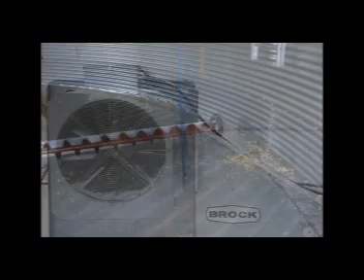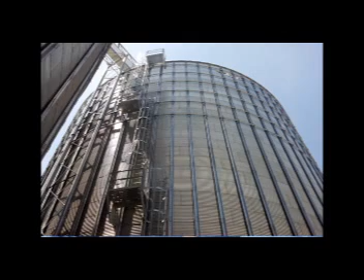Hello everyone, and welcome to the AgriDry series Grain Quality Control Topic of the Week. My name is Clint Walker, and today's topic is the recommendations and effects of freezing grain. When steel grain bin storage became available in the early 1900s, the bins were only 12 feet in diameter and stored only small amounts of grain. To help maintain quality during the winter months, many grain handlers froze the grain throughout the bin, which, to be honest, was a secure method to increase shelf life of the grain. Just like in a freezer in your home, it was able to hold the valuable product for a longer period of time until the bin became empty. And still, to this day, this method is favorable for dry grain if there's no way to monitor the grain inside the bin. However, this theory has changed for many grain handlers to maximize their profits. Freezing grain is costly and dangerous. Excessive fan run time to achieve the frozen grain temperatures increases electrical cost. The risk of having frozen grain columns throughout the bin can cause unloading issues as well. When the outside temperature begins to warm in the spring or summer, the temperature differential between the grain temperature and the outside temperature can cause condensation issues on the sidewall or the top of the bin, which leads to spoiled or crusted grain. As grain bins get larger with increased bushels, grain handlers are storing the grain for a longer period of time. The need for monitoring this equipment is a must. AgriDry reads Type T thermocouple cables in our Bullseye controller.

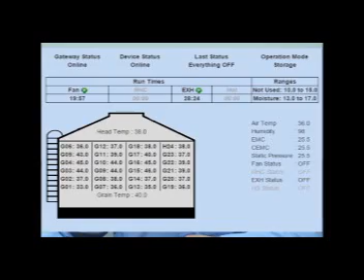Always knowing what the grain temperature is throughout the bin helps maintain quality and ensures the temperature front has moved through the entire bin. We typically read 6 sensors per temperature cable, with sensors evenly spaced from the bottom of the bin to the top. Sensor spacing and cable lengths are sized appropriately for each bin. We have the ability to read up to 4 temperature cables into the controller for a total of 24 sensors.

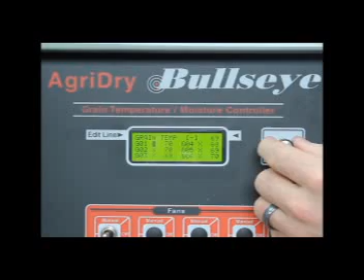The grain temperature is displayed on the controller consisting of 6 sensors per page, which you can select with an X for sensors that are only in the grain. You set up a target temperature window, and the controller will gradually lower or raise the grain temperature to the target window and will maintain that temperature until the settings are changed.

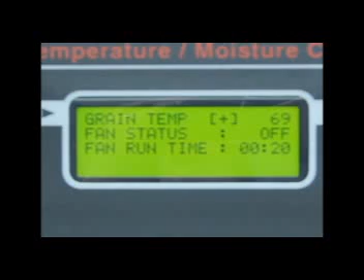AgriDry also controls the fans in the grain bin, in which we can assure that the fans do not operate during freezing conditions. The minimum air temperature setting on the controller is typically set at 35 degrees for aeration and natural air drying and prevents fans from operating below this temperature. When natural air drying grain, the grain temperature should never go below freezing. The moisture inside the grain cannot escape if it is frozen inside the kernel.

With the grain temperature always above freezing, natural air drying can be completed immediately as soon as the outside temperatures are consistently above freezing. If the grain moisture is high and the number of drying days are limited, the minimum air temperature setting can be set down to 30 to 32 degrees to capture more fan run time. This can only be done if the outside air temperature goes below freezing for short periods of time.

In conclusion, the equipment that AgriDry offers increases your profits by monitoring your investment and operating the fans when it's beneficial for the grain.

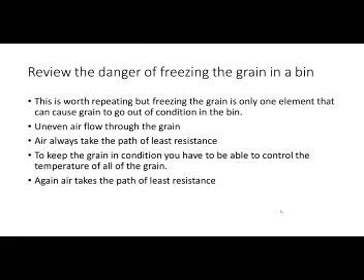So why does grain spoil in the bin? In a typical bin, there are spots that will never get any air through them, again, because of accumulation of fines. And I'm repeating and emphasizing this in the webinar this morning because it's very important. It's complicated, and a lot of people don't understand or don't have the equipment to properly monitor and control what goes on in the bin. So I'm pointing out and repeating what causes the problem. So you have an accumulation of fines.

You have the wrong size fans. They can either be too small or too large. And when I say fans can be too large, then simply, in most cases, if 3 fans are good, 4 would be better.

In fan sizing on any bin, bigger is not always better, because of the static pressure that's created by the fan, back pressure on the fans, once you reach a certain point with airflow going through the grain. There are two items that affect your static pressure. One is the depth of grain you're trying to move, and the other is the volume of air you're trying to move through that depth of grain. So if you increase the depth of grain or the amount of air you're trying to push through that depth, your static pressure goes up or down accordingly.

Now, what you want to do is maintain your fan efficiency by having the fan operating in its sweet spot. So if you increase your airflow, trying to push more air through that bin, you create more resistance coming through the grain, and then your CFMs per horsepower start to deteriorate, and you won't get as much air through it.

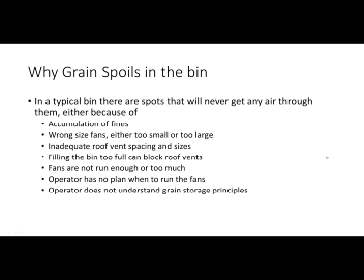Filling a bin too full can block roof vents. Again, you're channeling air, so if you fill it too full, that air can't get out or can't travel toward the vents, which will make trouble for you too. Fans are not run enough, or they run too much. So how do you run your fans? The operator may have no plan on when to run the fans, or does not understand the principles of grain storage. So let's go to your next slide, please.

The same thing can happen in the grain bin when you put warm air across cold grain, or cold air across warm grain, and you have more than a 10 or 15 degree temperature differential, and that varies some depending on the relative humidity of the air, how many degrees it would actually allow before the moisture condenses. When you condense that moisture on the surface of the grain, you're re-wetting grain, and that's where crusting starts. Next slide.

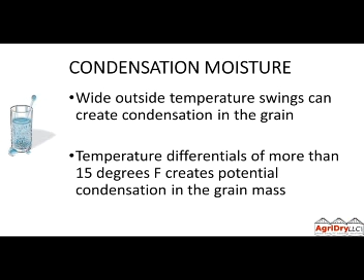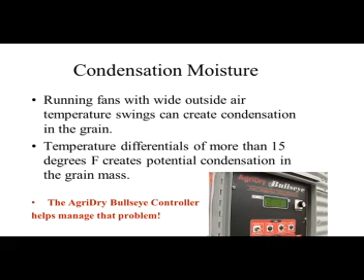And again, condensation moisture. Running the fans with wide outside temperature swings can create condensation, and a differential of more than 15 degrees Fahrenheit creates potential condensation in the grain mass. So an AgriDry Bullseye controller helps to manage that problem, because we set high and low parameters and don't run the fans in extreme high or extreme low temperatures, or when the outside air temperature is more than, let's say, 15 or 20 degrees away from the grain temperature itself, and then we eliminate condensation occurring inside the grain mass. Next slide. So this shows moisture migration in the bin. We've all seen these charts.

These were created years ago, and they've been around forever. So what that first picture illustrates on the left would be a bin full of warm grain with cold outside air temperature. So warm air rises and cold air goes down. So if you look at the arrows in the bin, center of the bin, the air is going up. Well, the outside air is colder, so the top surface of that grain is cold, and you're pushing warm air up through the center of the bin, because heat rises on its own. This is without running the fan.

This is just the fan being off, and the air actually going into the fan, creating a chimney effect through the bin. Now, if you block your fans or have dampers on your fans or shutters where you don't get free air going up through the bin, then you can avoid a lot of this. But sometimes you walk by a fan by the bin without a damper or a shutter on it, and the fan's turning, just the air going through it. Well, that's what's happening in the bin potentially when you have free air going up through the bin. So what you want to do is block your fan so you don't get the chimney effect going up through the bin.

The one on the right would show if you have cold grain in the bin and warm air outside, it's the reverse of that. Your warm air goes up the outside, cold air goes down the center, and your high moisture zone or re-wetting will happen in the bottom of the bin instead of on top. And this can be avoided with, like I said, dampers or shutters on your fans, and then letting the controller run the fans. The temperature will be uniform across there, so you won't have the moisture migration with the correctly operated aeration controller that we have with the Bullseye controller.

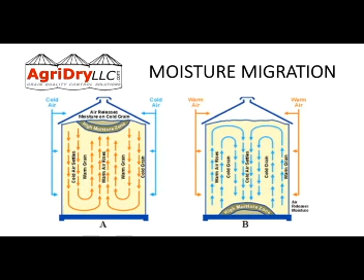Next screen, please. So moisture in the grain is water. This is kind of simplifying what the problem is in the bin, but water turns into ice when the temperature gets below 32 degrees Fahrenheit. So grain temperature below 32 degrees is not the main problem. The main problem is, again, condensation on the grain caused by cooling more than 15 degrees Fahrenheit at one time. Condensation turns into ice and crusting occurs.

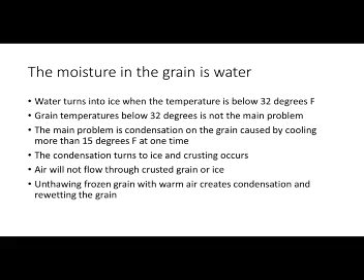Air will not flow through crusted grain or ice, and then when you go to thaw frozen grain, it's like taking a chunk of meat out of the freezer and putting it on the counter in the kitchen and waiting for it to thaw. You create condensation on the surface, and then re-wetting of the grain occurs. But imagine that chunk of meat being a chunk of grain in the grain bin, and that's a disaster when you get those kind of condensation issues on the grain kernels themselves inside the bin. So the freezing part, I'll get the next slide here, I think I'll cover that a little bit too. So it doesn't hurt to freeze the grain, but it's not necessary.

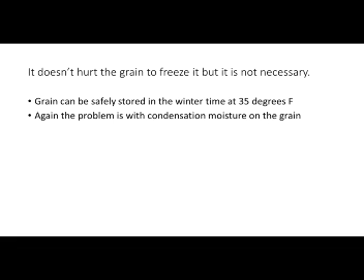And then there's safety in freezing grain, in the fact it's like taking food and putting it in the freezer. You get it below freezing, you don't have to worry about it. But if you have the condensation issues, then that creates other problems. So grain can be safely stored in the wintertime at 35 degrees Fahrenheit. And it's not necessary anywhere in the country to get grain temperature below freezing. It doesn't hurt to freeze it, but it's not necessary. Again, the problem is with condensation moisture on the kernel itself.

Next slide. So how do we keep grain without freezing it? So first off, spreading the grain for uniform airflow while filling the bin. We have a grain spreader that AgriDry manufactures and sells that will spread the fines throughout the bin so you have more uniform airflow.

And then monitoring the grain temperature with sensors in the bin, which is your temperature cable system, and operating the aeration system within the correct parameters. So what we have is we set limits within the Bullseye controller system to not run the fans when we have extreme temperature differentials between the grain in the bin and outside air temperature.

We also set the target moistures when we do run the fan, so that we select the right humidity of air going through the grain so that we don't re-wet or over-dry the grain using high or low humidity. So basically, we eliminate high and low temperatures, high and low humidity, and then compare the temperature of the grain from the sensors in the bin to the air that we're trying to move through that grain. And once we get the grain temperature within that 15-degree temperature differential, we can turn the fans on and turn them off successfully and not create those kinds of situations in the bin.

Whereas without a controller, without sensors, we're told turn the fans on and never turn them off till that front is all the way through the bin. And that's the correct way to do it without sensors, without a controller. But once we get the temperature with the controller within the parameters of where we want the temperature to be, wintertime storage, 35 degrees would be our target. Our window would be set 30 to 40. So if our grain temperature is between 30 and 40 degrees, it's where we want it to be.

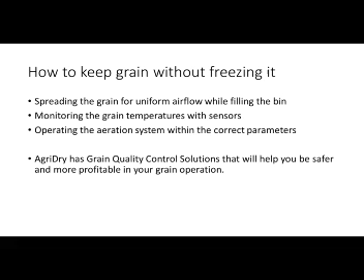But with properly monitoring and maintaining the grain in the bin, you manage shrink, so you're not losing money, and that's important, but the loss of life is even more important. So this all ties together, and the bigger these bins get, the bigger the problems are in these bins. But the solutions that we offer with AgriDry, with our grain spreader and monitoring, controlling those fans, it completely changes the whole environment inside those grain bins.

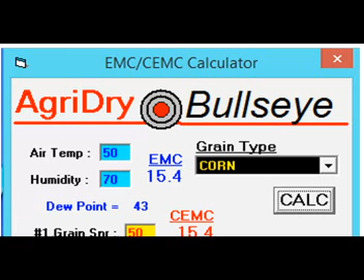So this shows 50-degree air temperature and 70% relative humidity, and if we drop the temperature from 50 degrees down to 43, that's only 7 degrees and that air reaches the dew point, and that's half of 15. Now the dew point itself, the farther over you go, the worse it gets, because that air can't hold that moisture. When you cool it down, it just drops it out into the atmosphere. And in this case, the atmosphere is the grain itself where the air is running through the system. Next slide, please.

This is an example here. We got 65-degree outside air temperature, and I keep repeating this because this is serious stuff in grain bins that can be avoided. And by avoiding this, we can avoid crusting, we can maintain grain quality, it just goes on and on from there. Safety, profitability in your grain operation.

So if you have 35-degree grain in the bin and run 65-degree air through it, you're going to potentially create in that bin what you see with that glass of water on the right. You've got colder inside and warmer outside, and condensation occurs. Again, the outside of that glass would be the grain inside your bin, and you're dumping moisture back into that grain by cooling it down way past the dew point temperature. Next slide.

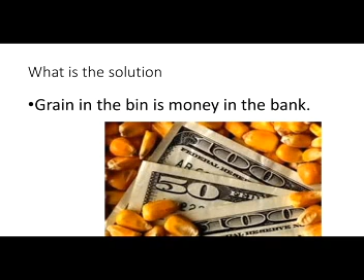So what is the solution? Grain in the bin is money in the bank. We've got $3.60 corn in bins in the U.S. right now. Soybeans are down. Grain prices are half what they were 3-4 years ago. But $3.50 corn is still money in the bank. And if this was money in the bank, you need to manage it. So what is the solution? Here's the solution. Let's go to the next slide.

So it's a risk management thing. What we have here is you manage your grain like you manage your money. So how do I do that? Well, you know what condition it's in, and this is moisture and temperature of the grain in your grain bin. Then control what you can, basically operating the fans under the right conditions to avoid the condensation. Freezing is part of it, and condensation is the bigger part of it.

And the other thing is, just like your money in the bank, you manage your risk, because you wouldn't put it somewhere where you're going to lose it, and that's a topic for another whole webinar. But we have grain in the bin that equates to money. We can relate to that, so you know in what environment grain will thrive and increase in value, just like your money. So you want to create the environment in that grain bin.

It's a combination of moisture and temperature, and if you can manage those in the grain bin and keep them within the parameters, you get the shelf life of that grain, so you can keep it for a long period of time without deteriorating, just like your money in the bank. It's the same kind of deal. There's enough science behind grain management, knowing what to do in the bin, and then we have some technology that we as a company provide for you to be able to manage your grain in your bin.

Hire someone to help you manage your grain. That's what we do as a company. We work with the end users, and if you own our equipment already, which most of you, I believe, probably do, we're doing customer training meetings. I just did one yesterday and one on Monday in Mississippi, and did one in Memphis, Tennessee last Friday.

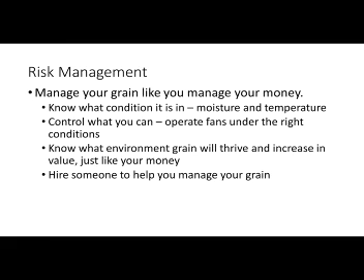Again, what's in those bins is money in the bank, so you need to watch and take care of it, just like you would cash or bank accounts or other investments, wherever you put your resources. So next slide, please.